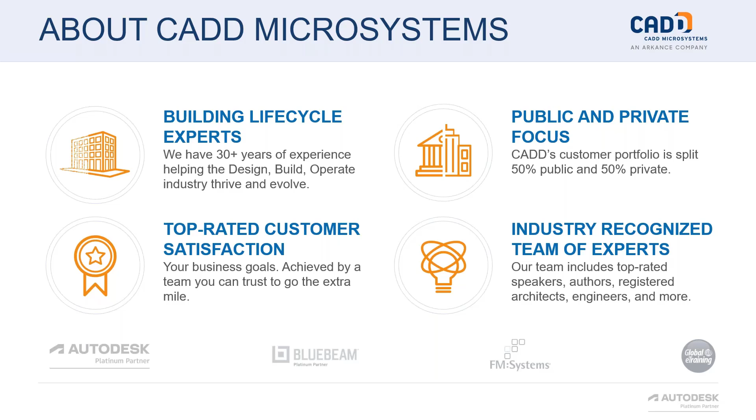Following along with that educational approach, here at CADD, education is a core value, and we work hard to empower the design and construction community to share knowledge, to connect with one another by providing platforms such as the AU Passes. This series came from feedback we got from a lot of our customers and their frustration at not being accepted to speak at Autodesk University. This isn't because the presentations and ideas aren't innovative or relevant, but simply because you can only pack so much content into a 3-day conference. This is the next in our series of continuing AU Passes, and we are thrilled to have Noah join us. Noah?

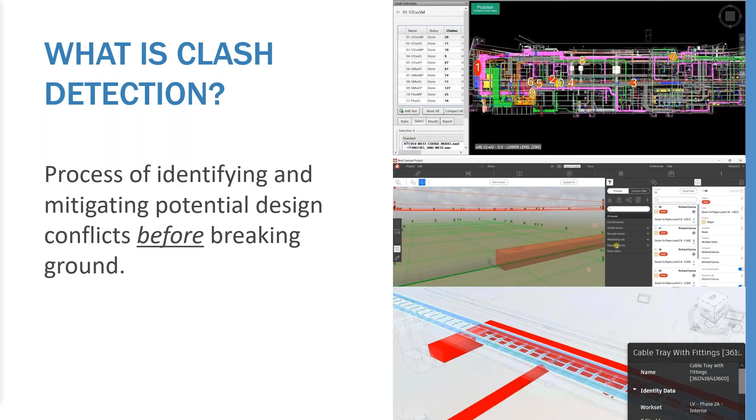When different design disciplines are not communicating, it's easy to find oneself working off of incorrect assumptions. If the architect wants a 12-foot tall ceiling in a space that only has a 12-foot-10 floor-to-floor height, but they haven't modeled it yet and they haven't given the rest of the team a heads up, the MEP engineers have no reason to believe they can't just route ducts through that space. If design members aren't looking at what the other team members are doing, whether turning off links or failing to ever link in the Revit models in the first place, your project is going to have overlapping elements.

A lot of equipment requires access and clear space requirements that are not always modeled, so the information may simply be missing. It's also common for the initial layout of a building system to be done without any consideration of other systems. This could end up with all your fire alarm systems being placed just 4 feet off the ground, or all of the ductwork originally being modeled right below your composite deck, where the structural supports would normally reside. And while we would expect these things to be shifted into the correct place, time constraints can often lead to elements being left in unintended locations.

Honestly, all it takes is one person missing a meeting, missing an email, or even just being distracted for a moment in a meeting, for them to miss a change being made by the rest of the design team.

We're imperfect creatures, we make mistakes, so it's vital that we put in place processes to help mitigate these mistakes. So let's dig into the software that can help.

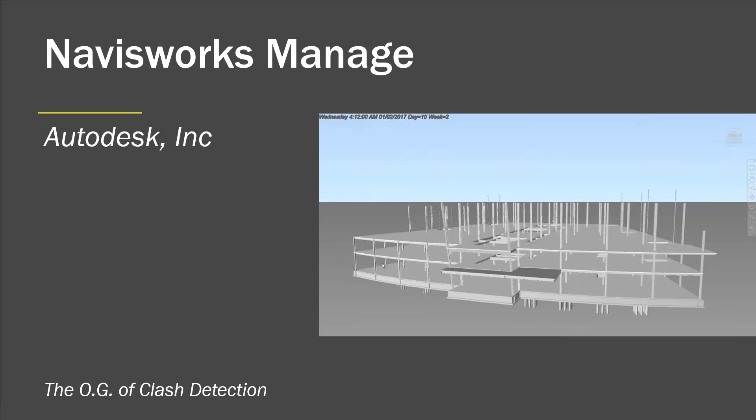Today, annual subscriptions can be purchased for Navisworks individually or as part of the larger AEC collection subscription that also gives you access to software like Revit and AutoCAD. I should point out that Navisworks is more than just a clash detection tool. The software has a ton of tools that contractors and construction managers find vital to their work, such as Timeliner, shown here, a set of construction simulation tools.

Now, unlike ACC model coordination, Navisworks is, in its current form, a desktop application. It uses a traditional file system that only allows a single person to work on any given file at a time. While it does have ways for you to share files with other project team members, Navisworks is not really intended to be a collaborative environment where multiple people can simultaneously review and edit a single source of truth.

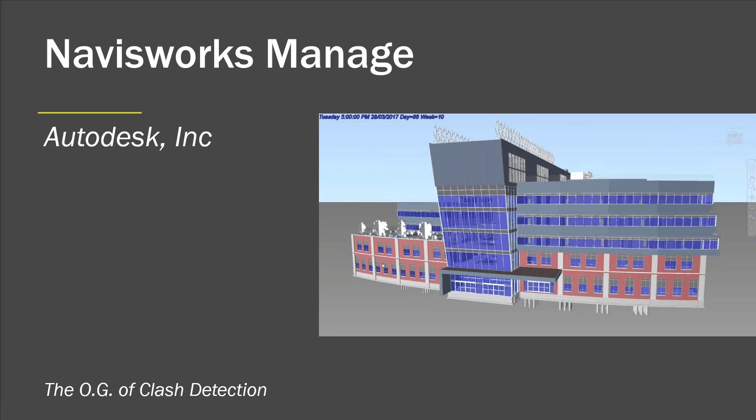Now, that is not to say that it isn't a solid piece of software. In fact, it has remained an industry standard for so long because it has always done a great job at what it has set out to do. But when it comes to clash detection, there has not exactly been a surge in new features added to the software in the past 20 years. Now, on the one hand, this has created a stable user interface and has made Navisworks a reliable and consistent product year after year, without much in the form of new or sudden learning curves.

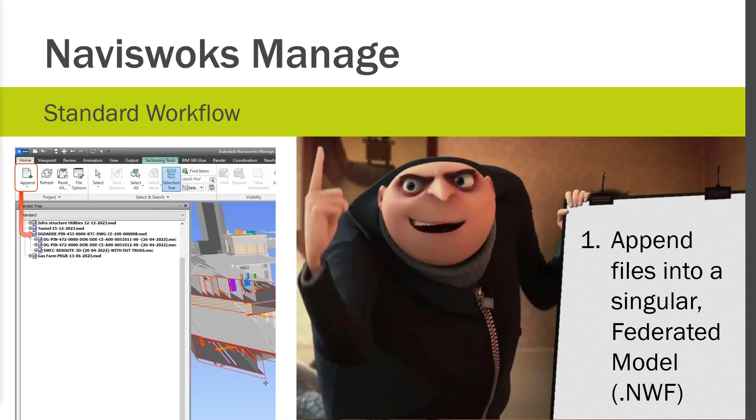But there are many features that Navisworks users feel are lacking in the out-of-the-box software. And for many years, it has seemed like Autodesk has just relied on clever individuals and third-party software companies to fill these gaps. The clash detection workflow in Navisworks is pretty straightforward. Assuming you have an established shared coordinate system used by all your various models, you can either export Navisworks formatted NWC files out of Revit, or just append whatever project models you have directly into Navisworks. Doing so creates a federated Navisworks model, also known as an NWF file.

The next step can be pretty time-consuming, but mostly just the first time you go through the process. You see, at this point, you are defining the various chunks of data you will want to use in your clash tests. If you do this by searching for specific categories or properties of elements, rather than just manually clicking on the elements you want, you can save these search sets in Navisworks, and they'll be dynamic. That means if new elements of these same categories are added to your model and you go through the process again, Navisworks will automatically include the new elements when you use that same search set.

Setting up all of these different search sets can take a very long time, but once you have them set up, you can export them as an external XML file, which you can then import back into any other Navisworks model you make for other projects in the future. So as long as you stick to the same workflow, subsequent projects will end up running much faster.

The next step is opening up the Clash Detective and creating new clash tests. This could be as simple as running all structural elements against all mechanical elements, or it could be more precise, like running a clash test just of sanitary pipes versus all ceilings and light fixtures. Now, just like with search sets, this is something that can take a long time to set up that first time you use the software. But you can once again export the clash tests out of Navisworks and import them again into other projects later on.

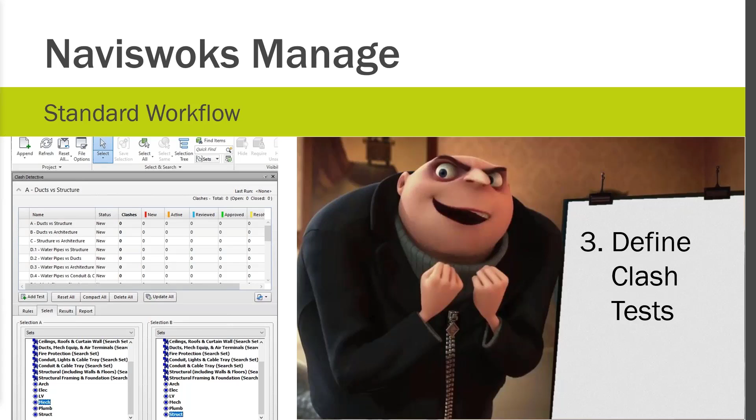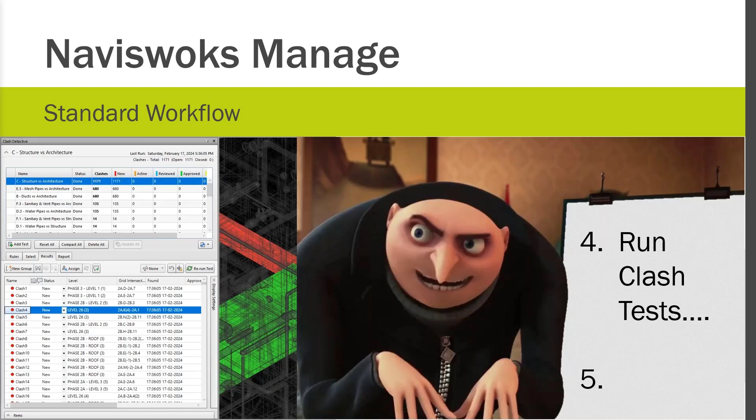All right, so now you have your clash tests. You can run them and get accurate results listing all the clashes that exist in your building. But that's the thing. It will give you all of the clashes in your building. And this is where Navisworks stops being so useful. There are no tools in Navisworks to help you weed out what is and what is not an actual clash you need to be worried about.

You may have wanted to find every instance where a vertical pipe was protruding out from a wall, but if you're running a clash test between pipes and walls, Navisworks is going to spit out not only every instance where the pipe is 100% completely contained within the stud cavity of your wall, but also every instance of pipes just passing horizontally through walls as they go from corridor into a room.

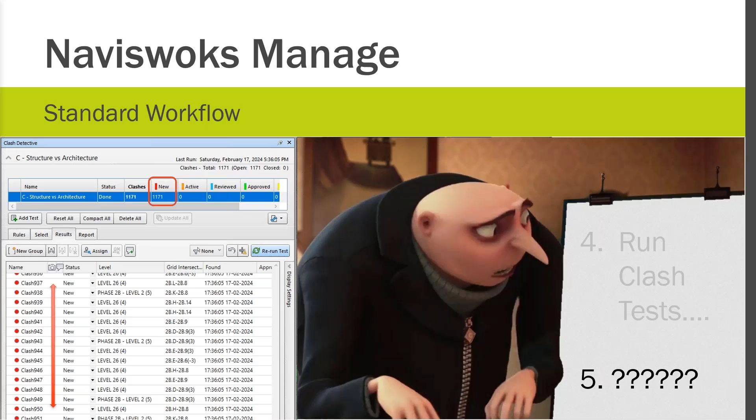Additionally, you can't easily sort your clashes by multiple categories. Sure, you can sort them by level, or you could sort them by the nearest grid intersection, but you can't set up a hierarchy where it first sorts by level and then by grid intersection. And simply trying to quickly navigate around a Navisworks model can be challenging in its own right, as zooming in and out can often be hampered by other elements in the model. So without the assistance of some sort of add-in, the process of reviewing all of your clashes in Navisworks, figuring out what are the real issues and what can be ignored, can be an incredibly long and mind-numbing task.

And as far as communicating the clashes to your project team, you're either just sharing your screen on a Zoom or Teams meeting while you flip through hundreds or thousands of clashes while struggling to show people where you are in the model at any given time. Or you can package up your Navisworks model and send it out to your team, listing out in an email the clash numbers you want them to take a look at. Navisworks can make a report, but again, it sends out everything. It's just really not good at helping to parse down or organize the data. So that brings us to the add-ins: Newforma Konekt, the Autodesk Issues add-in, and Sherlock.

Newforma Konekt kicks us off by using a tool called Group Clashes. Now, this tool originated in 2012 when a civil engineer named Simon Moreau started a blog called BIM 42. Simon developed the tool, and after posting it on his blog, it sort of took off. You see, if you run a pipes versus beam clash test in Navisworks, and you have one beam with like 20 pipes passing through it, Navisworks will catch all of those 20 different clashes and report them back to you individually and interspersed with the hundreds or even thousands of other clashes found all over your building.

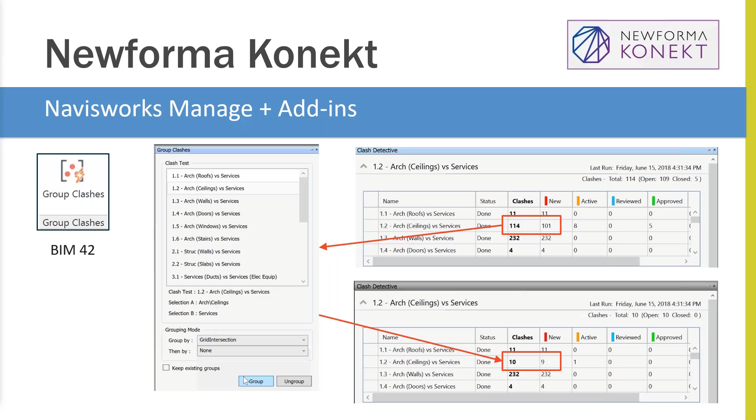The group clash tool was acquired by a company called BIM1 in 2015 and placed in a software called BIMtrack. BIMtrack was then purchased by Newforma a little over a year ago and rebranded yet again, but the group clashes tool really hasn't changed much in all that time. It can still save you a ton of time, greatly reducing the number of conflicts you're reviewing, but it isn't the strongest clash grouping tool on the market anymore. That said, you can still purchase the BIM 42 group clash tool through the Autodesk store for a mere $10. And depending on the type of work you do, it may be all you need. But what Newforma Konekt does now, beyond the group clashes tool, is what gives it value.

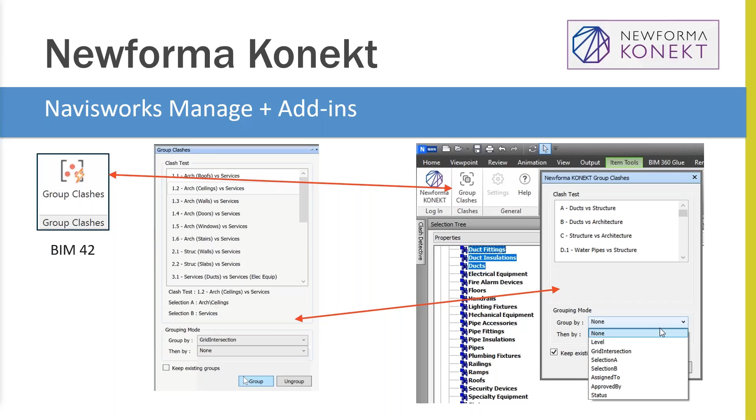Newforma Konekt lets you publish your clashes to a cloud network, and through a series of other plugins allow you to access the clashes you published in a variety of different software. Now your design team never needs to actually open Navisworks if they don't want to. The electrical engineer can open their Revit model, filter the list of published clashes to only show those that involve electrical, and then navigate to the spot in their Revit model where any of the published clashes exist.

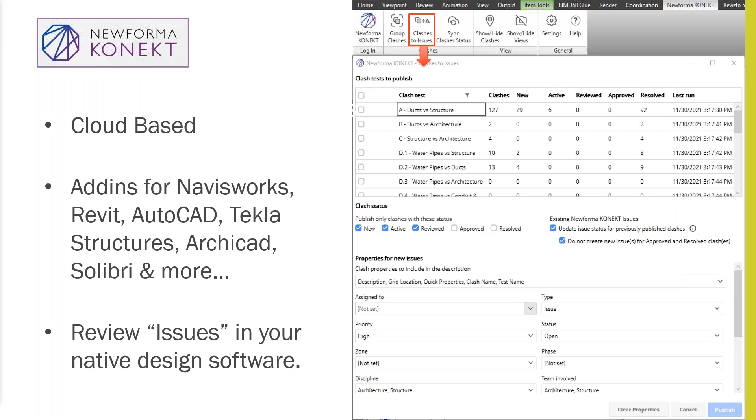This can eliminate the need for lengthy coordination meetings where you're just showing your project team members the issues that need to be resolved, and instead gives the power back to those team members to resolve the issues on their own. And since the data is cloud hosted, you can go to an online project hub and review project metrics, drilling down your data to look at clashes by defined zones, by discipline, by status, and so on. You can also track the progress of your project and see when people are resolving clashes, set up regular automated reports to be distributed daily, weekly, monthly, whatever, to your project team.

To use Newforma Konekt effectively, however, you need to have enough licenses that you can give them out to all of your project team members, including the members of other design firms you're working with. It doesn't matter if the plumbing engineer you're working with already has a license for the software. If you want them to access your project hub that you are hosting on your company's account, you're going to need to provide a license to that engineer. For smaller projects, this might mean one license per design discipline. But on larger projects, you could end up needing to give out 25 or more licenses to all of your consultants.

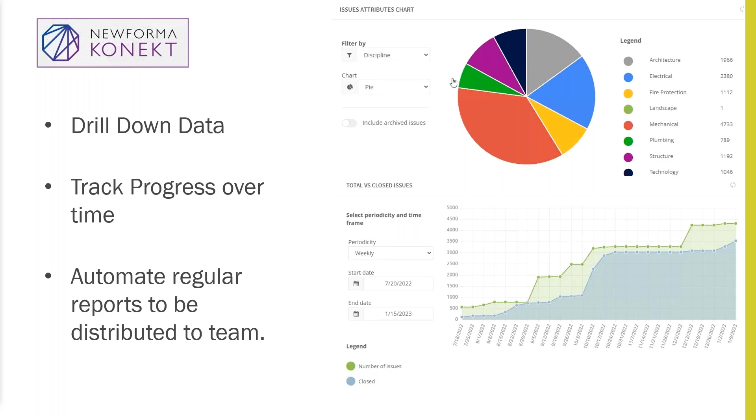That brings us to Autodesk Navisworks Coordination Issues add-in, which is a free plugin and works with the Autodesk Construction Cloud platform. While it works best when projects are cloud hosted on BIM 360 or ACC, it can be used on its own. It does require setting up a project hub on ACC or BIM 360 because you need to associate the issues you create with a particular project. But setting up ACC projects only requires one person in your company, maybe the account admin, to have a license of BIM Collaborate Pro.

Just like Newforma Konekt, there's a clash grouping tool here that allows you to group clashes by level, object type, unique object, or nearest grid intersection, as well as a whole host of other categories, many of which can be honestly completely useless, which makes navigating through the long list of options a bit daunting and possibly a bit futile. But by using the level-grid option, you can significantly cut down on individual clashes you need to review.

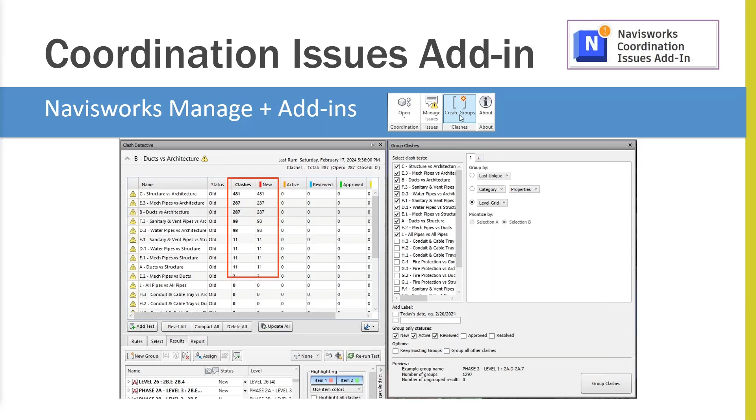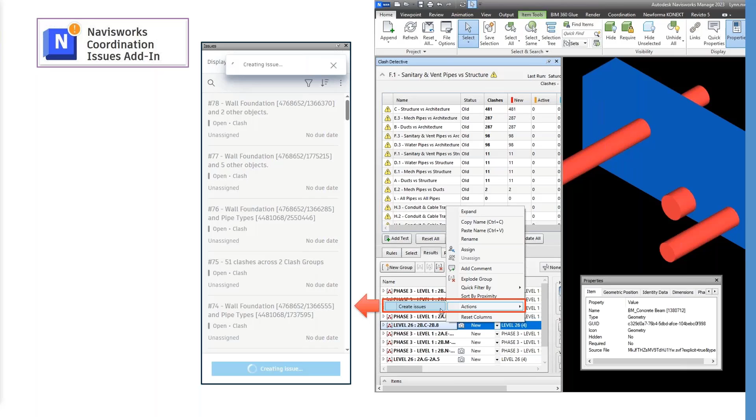When you have a clash you want to make sure your project team is looking at, you can right-click on it and select Create Issues from the Actions option. This will bring up a dialog where you can provide a description, assign the clash to someone to resolve, and categorize the type of issue you're logging. This pushes the issue up to the Autodesk Construction Cloud, and other project team members can review the issue in the project. For each issue created this way, a pushpin is graphically added to your model. You can then begin to see clusters of areas that need more attention.

These pushpins can be turned on or off and are only visible if the Manage Issues tool has been activated in Navisworks. I'll also note here, you can manually create an issue this way by clicking the Create Issue button. You'll be prompted to place the location of the pushpin in the Navisworks model, and then you can fill in any of the information you want. Now, if you install the Issues add-in for Revit, you can then see the list of these issues from within Revit, and even see the pushpins.

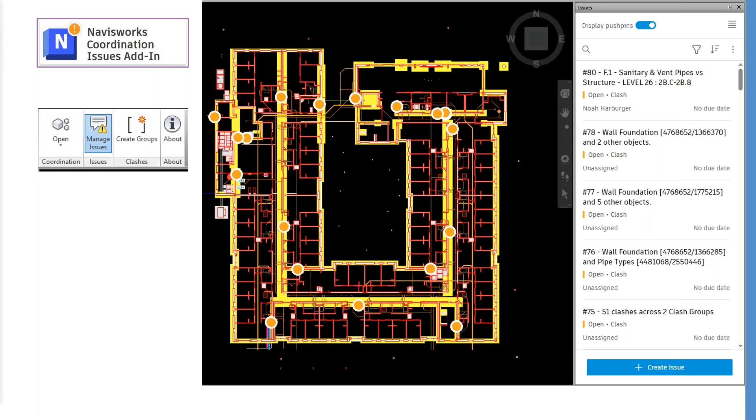That said, from my experience, navigating to the clashes and isolating the elements included in a particular issue currently does not function as well as one would hope. It typically just takes you to a zoomed in axonometric view of the clash, but the rest of the model is still turned on, so you can't actually see it. Anyway, from the ACC Project Hub, you can create PDF reports of all the active and in progress issues in your project, which can be distributed to your project team on a regular basis.

So let's shift our attention to the last add-in, Sherlock, which aims to give you all the tools you need inside of Navisworks, so you don't really need to push any information to any other programs or platforms.

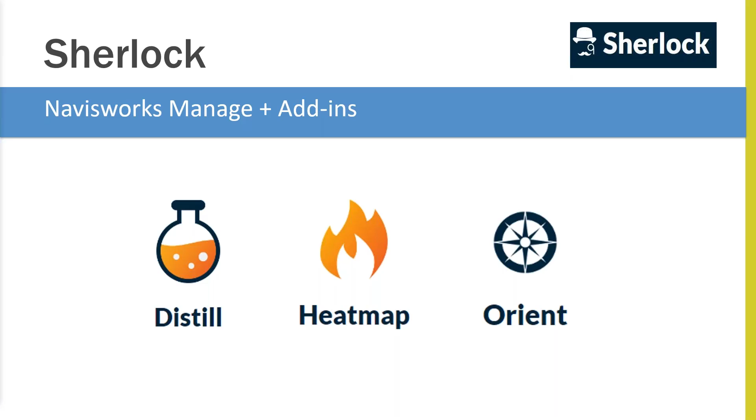Sherlock has three main features: Distill, which is what it calls its clash grouping tool; Heat Map, which analyzes all of your clashes to find the most problematic areas of your building; and Orient, which helps you quickly show people where you are in the building without needing to use the zoom or orbit tools.

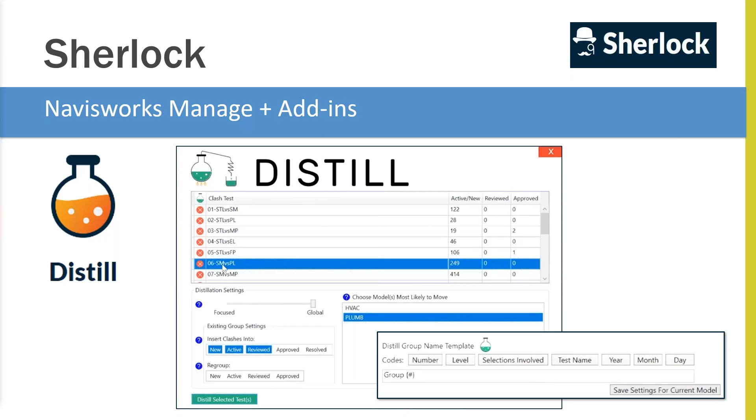Unlike any of the other tools we've looked at, Sherlock's Distill feature allows you to adjust your clash group setting with a slider to be either more focused or more global. This is going to impact how many clashes get pulled together into a single group. The more focused you adjust the slider, the smaller the clash groups will be. Furthermore, within the Sherlock settings, you can adjust how groups are named so that they will be easier to sort and organize during coordination meetings.

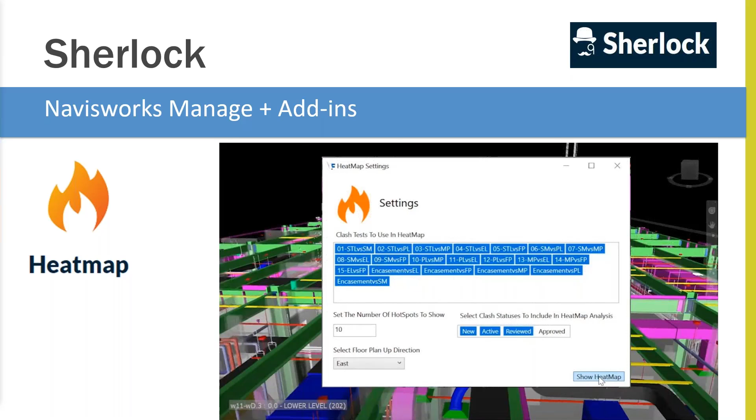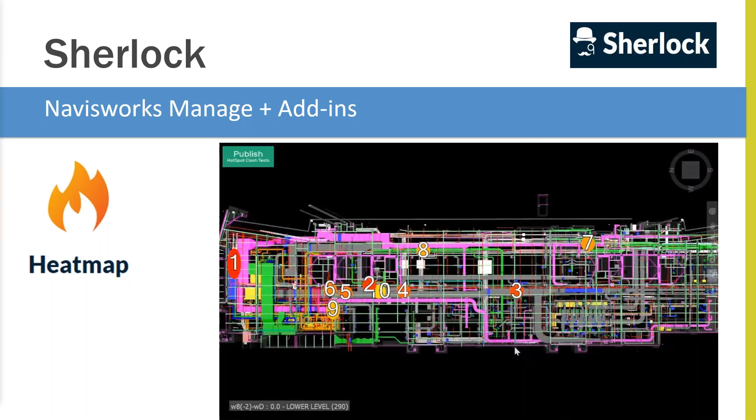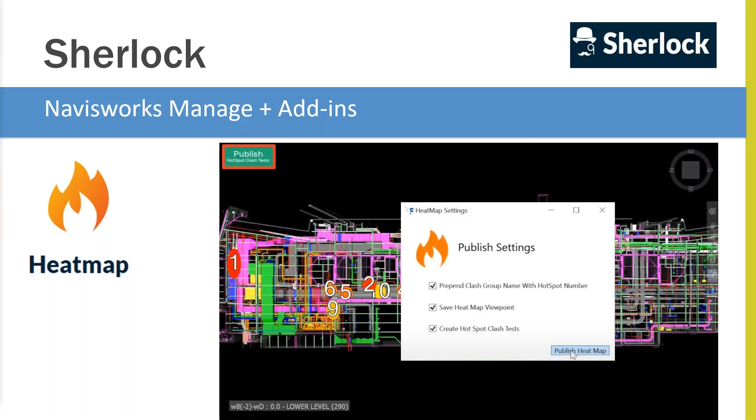In Navisworks, you can only really look at one clash test at a time, but with the heat map tool, you can analyze any number of clash tests all at once and find the most clash-filled areas of your project. These numeric objects actually get added to the Navisworks model and are viewable as you navigate through the model. And if you publish the heat map, you can add the hotspot names as prefixes to your various clash groups, making them even easier to sort and review in coordination meetings.

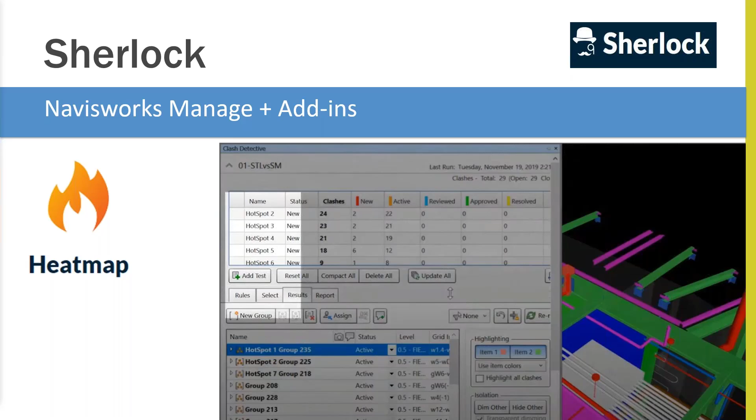Additionally, you can generate new hotspot clash tests that gather the clashes from the other tests and group them together in the clash detective. This makes it even easier to track coordination progress in these problem areas. It can be hard to follow along when someone else is driving a 3D model. And while it may only take a minute or so to show someone where you are in the model at any given time, throughout an entire coordination meeting, those minutes can really add up.

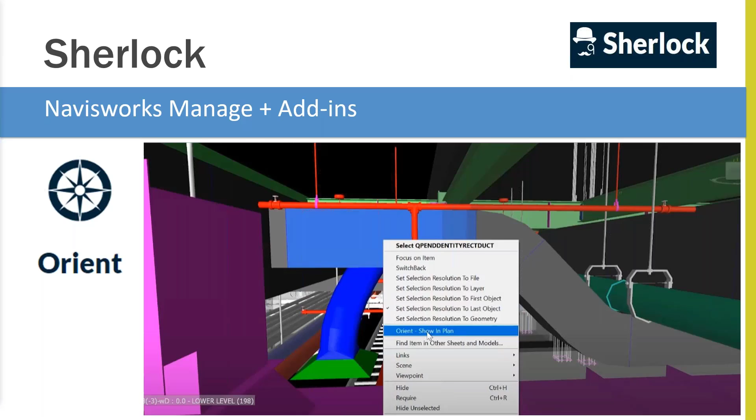With Sherlock, you can select any element in your current view, right-click, and select the Orient Show in Plan option. You'll instantly be taken to an overhead plan view of your model where a big red arrow is placed to show where you were. You can quickly save this viewpoint by clicking on the camera icon in the lower left, and then just as quickly return to your previous view by clicking the Shift and Escape key.

Also, Sherlock has a tool that lets you create areas or zones within your Navisworks model. For each area you draw, you can control the levels on which the area exists. These zones can be simple rectangles or whatever jigsaw puzzle piece shape you choose. Once you name your different areas, you can use the area designations in the Distill clash group auto-naming.

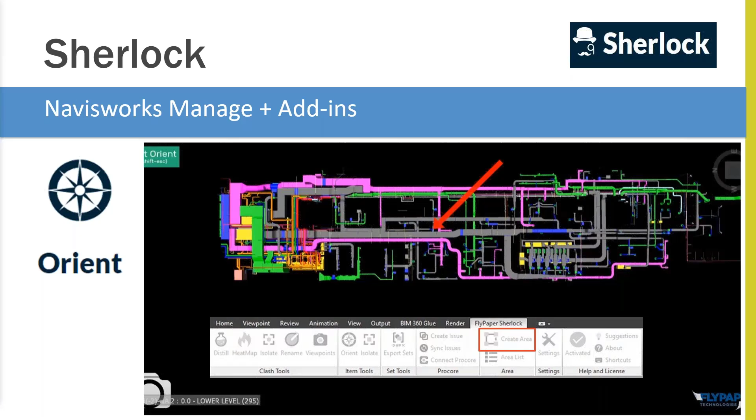As far as licensing goes, with Sherlock, you can get an individual user license at a monthly or annual rate, or one or more annual floating licenses that can be shared across all members of your firm.

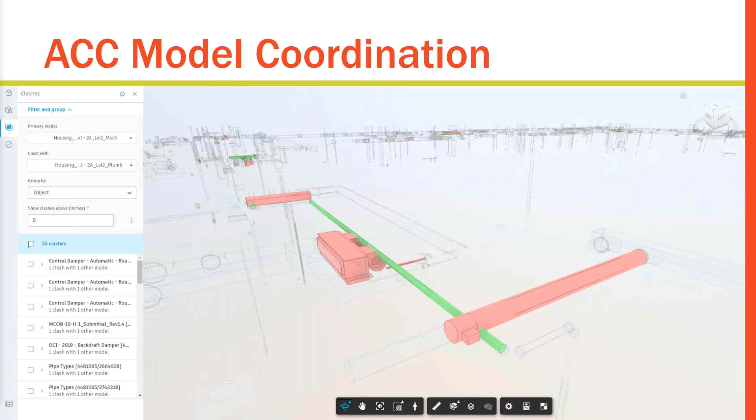So this brings us to the ACC Model Coordination module. We've seen what Navisworks can do with and without plugins. But if you're working on a cloud-hosted model in BIM 360 or the ACC platform, this is an option you should seriously consider. As a web application, the Model Coordination module requires no clash detection software to be installed on your machine. Additionally, there's no need to manually export files out of Revit and manually import them into the clash detection software, because this can all be set up to occur automatically through the BIM 360 ACC platform. It does, however, take a little more initial project setup inside of Revit to get things started.

First, you're going to set up a series of scope boxes throughout your building, at least one scope box per building per floor. Then you'll set up a series of view templates that isolate only the building elements from a particular discipline: mechanical, electrical, plumbing, and so on. For architecture, you should turn off things like furniture and casework, basically anything that gets put into the building after the walls and ceilings are all closed off.

Then you're going to create a series of 3D coordination views, one per discipline per scope box. Depending on your project size, you could end up with a ton of views here. But this is the hardest part of project setup. We don't have it up and running yet, but we're currently looking into automating this process in-house using a custom Python script that will be run through the PyRevit plugin in Revit.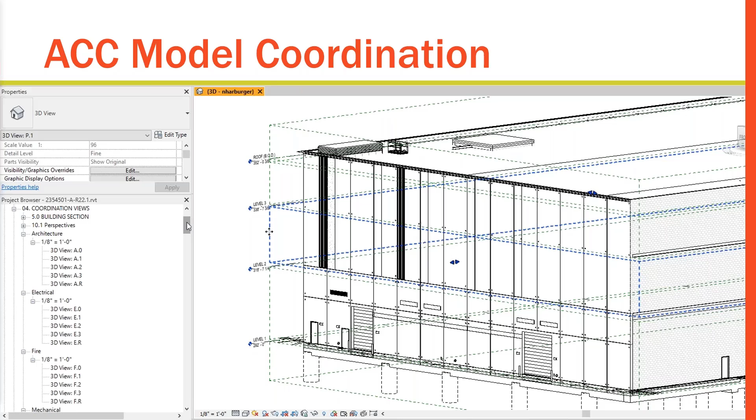All right, so next, open up your project's publish settings and create a drawing set with all of the coordination views you made. By checking the box next to the drawing set's name up top, these views will now be included every time you publish your Revit model. If you've set up weekly automatic publishing through the Design Collaboration module in the ACC, these published views will be updated automatically every week as well.

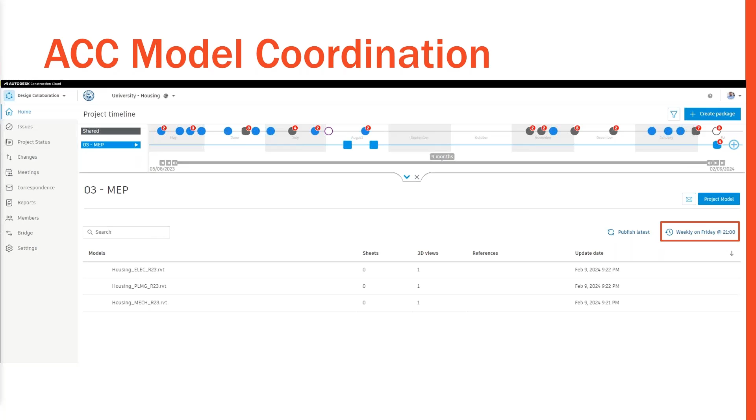And it's these views that will be powering the automated clash detection feature in the model coordination module. Now, in the models section of the model coordination module, you should see all the views you've published listed here as models. Check off all the different discipline views for a given level and click the Open in Viewer button. This will bring up a view of that level with all of the different disciplines present.

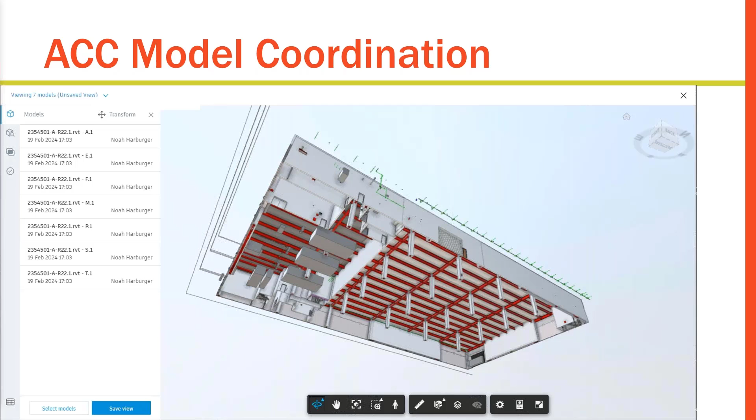Click on the Save View option and repeat this process for all the levels of your building. These views are then visible in the Views section of the Model Coordination module and can be used to organize and filter your automatic clashes. Because the default clashes view will have a very large matrix of all the different model-to-model comparisons that it's automatically running clash tests for. By selecting a view and filtering to a particular level of the building, you get a much more manageable matrix of clashes to investigate.

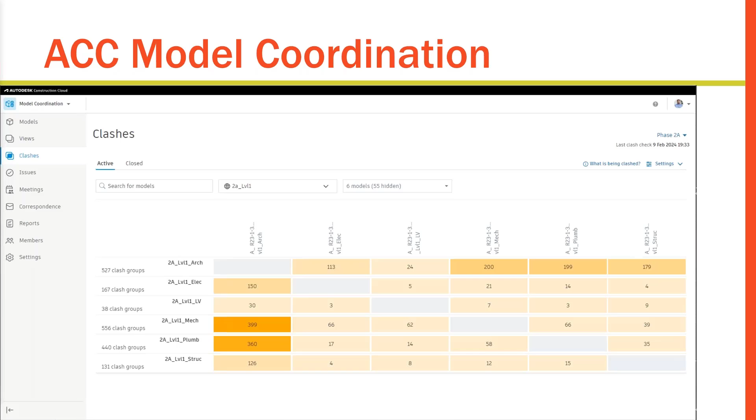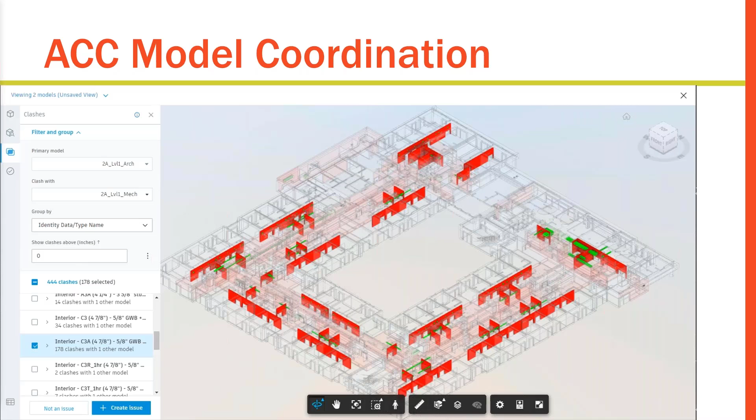Here, I can see there are a lot of clashes between architecture and mechanical. After clicking on the clash test from the matrix, I can change my grouping style to organize the clashes by architecture model's element type name, and quickly see that the vast majority of clashes here are with my project's most common interior partition type.

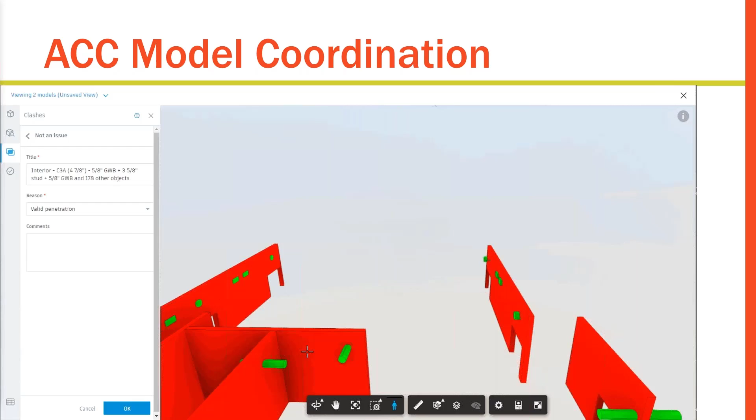After toggling the rest of the model off in the View Settings option, I can then quickly see that all of the clashes found are actually just acceptable pass-throughs of ducts and the placement of wall-hosted equipment. While selecting this clash group, I can then click the Not an Issue button and indicate that these are all valid penetrations. And then when I click OK, these clashes will be removed from the clash matrix.

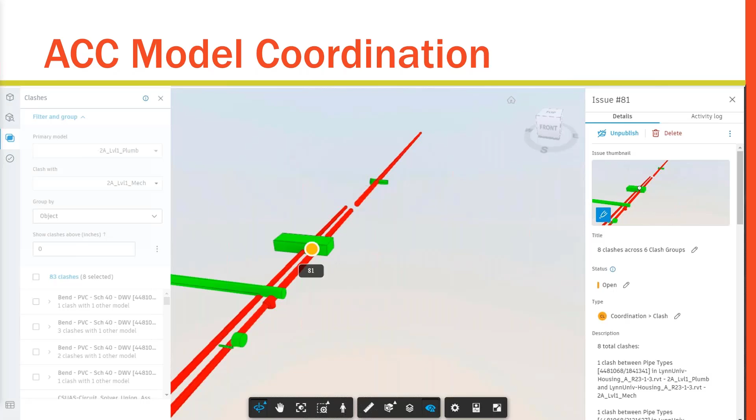If you find something in your review that you want to make sure other design team members take a look at, you can select the objects involved and create an issue just like we did in the Navisworks Coordination Issues add-in. You'll be prompted to place the pushpin location, and then it will create an issue that combines the various clashes and clash groups. Just like with the Navisworks Issues add-in, we can navigate to our saved model coordination views, activate issues, and easily see where throughout the building the coordination issues are located.

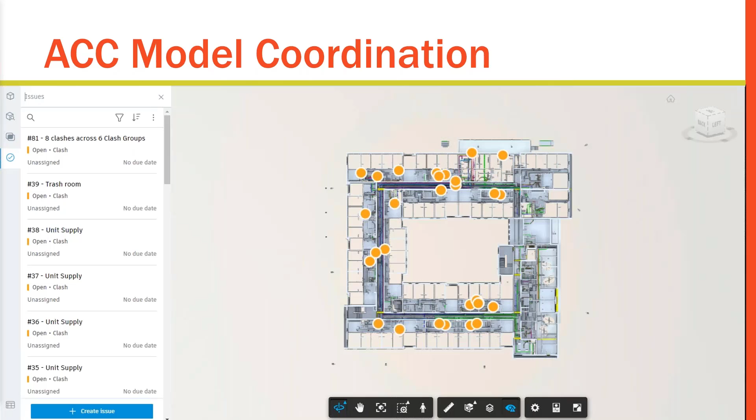These issues can be viewed in Revit through the Issues add-in, and reports can be generated just like we discussed with the Navisworks add-in. All right, so I've just thrown like 2 hours of content at everybody in just over 30 minutes.